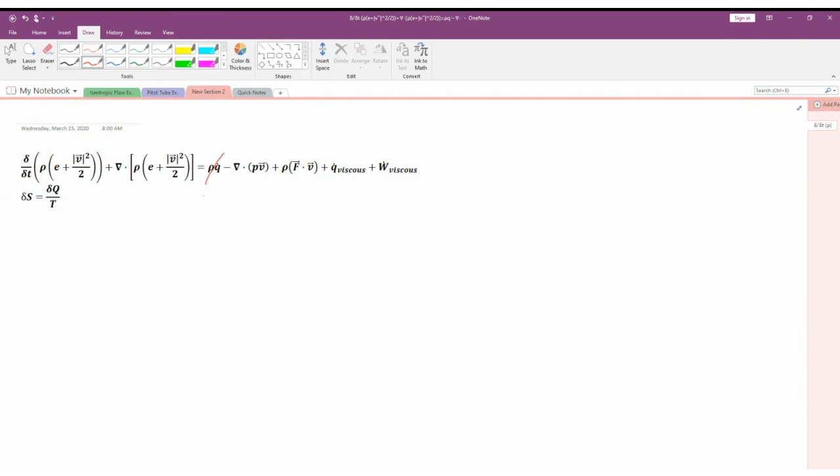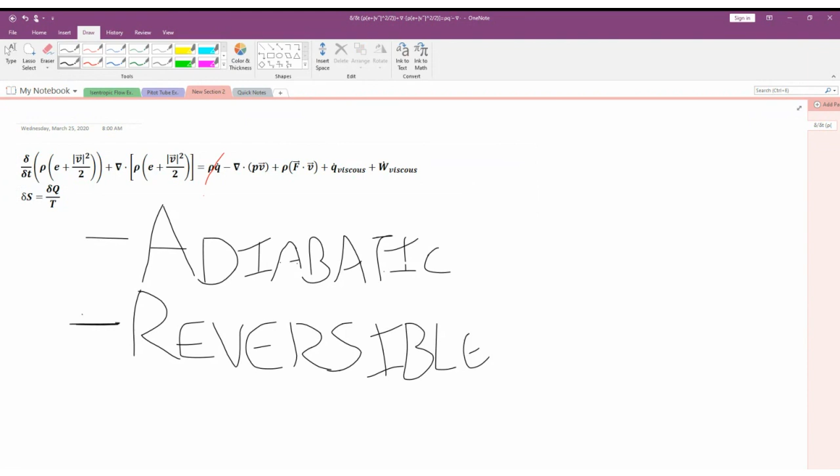But maybe the better way of thinking about it is that in order to be isentropic, the process has to be both adiabatic and reversible. Now, reversible, friction effects - no, so that gets rid of any viscous terms in here. We got rid of the last one not because of the isentropic assumption, but just because we assume that body forces, F, were equal to 0.

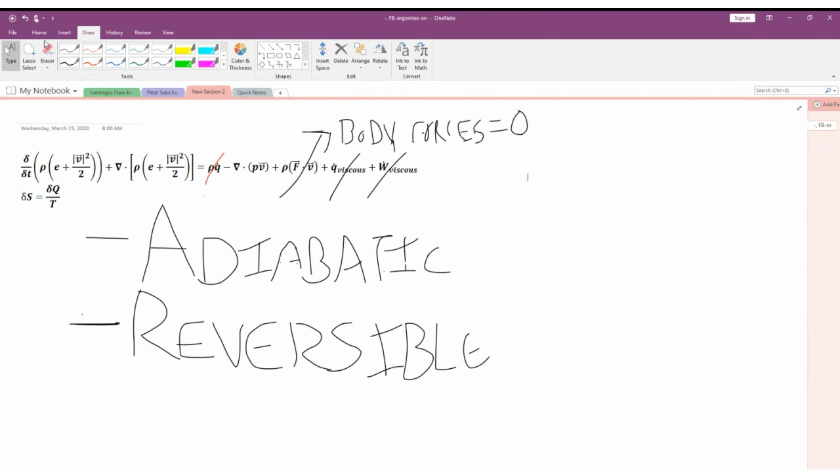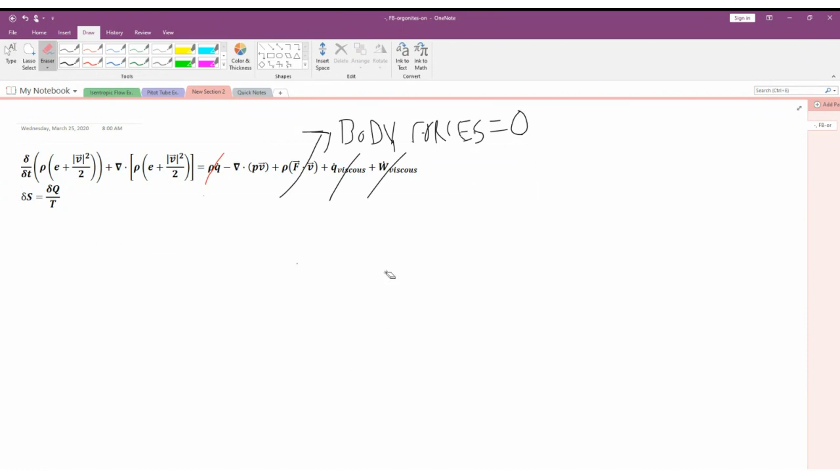Okay, we on board with that? Yeah. Sweet. All right, so isentropic processes are both adiabatic and reversible. It implies that it is an inviscid process, as well as one in which there is no heat transfer. We additionally assume there are no body forces, so it kind of simplifies the expression a little bit more, just ignoring EM fields, gravity, all that jazz.

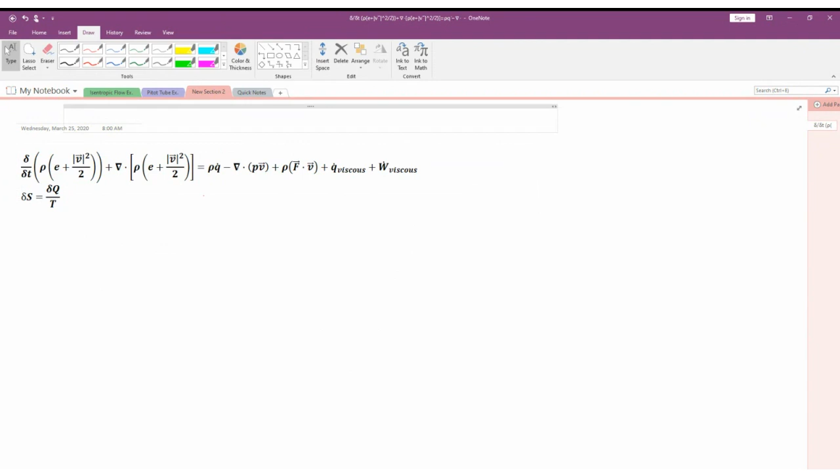Great. All right, so by using those and assuming steady flow, we got ourselves some isentropic relations as well as some stagnation relationships, or total condition relationships, where we related total pressure, total temperature, and total density to Mach number. So based on the incoming flow, if I isentropically slow that flow down to 0 speed, I can figure out

some relationships between pressure, temperature, density, etc., between the free stream and the stagnation point. That does, of course, assume a calorically perfect gas, which is - what is a calorically perfect gas? Calorically perfect glass - that'd be something interesting, gas is part of that. Absolutely perfect in every way. In some ways, in the adiabatic ways.

So it means that the CP/CV is that of an ideal gas, right? A perfect gas is one that you can treat as an ideal gas. A calorically perfect gas is one where the specific heats are constant. So your value of CP and CV you treat as a constant because their actual variations are relatively small over the range of expected temperature variations, which for us is pretty much anything under 1,000 Kelvin.

So, cool, all right, that's that. What I want to look at then, if we've talked about what some of the effects of going compressible are, maybe we can look at some of the more visible effects. So the 3 images we got here, these are either Schlieren, which is what we looked at first day of compressible flow, showing variations in color, black and white, with the exception of where a thing is, like right here or here.

Variations in color are variations in density. It's really variations in the first derivative of density, but we'll use it as a proxy for density here.

density here. Hello, Koi.

This one with the airplane in it is called a shadowgraph image. It's kind of like if you're looking down the road and you see a mirage, you're seeing density variations too. If you see shimmering bubbles of air, that's more or less what a shadowgraph image is. It's more like a background-oriented Schlieren image, usually called that, where you're looking at a background and seeing the density variations on it, instead of by the Schlieren method.

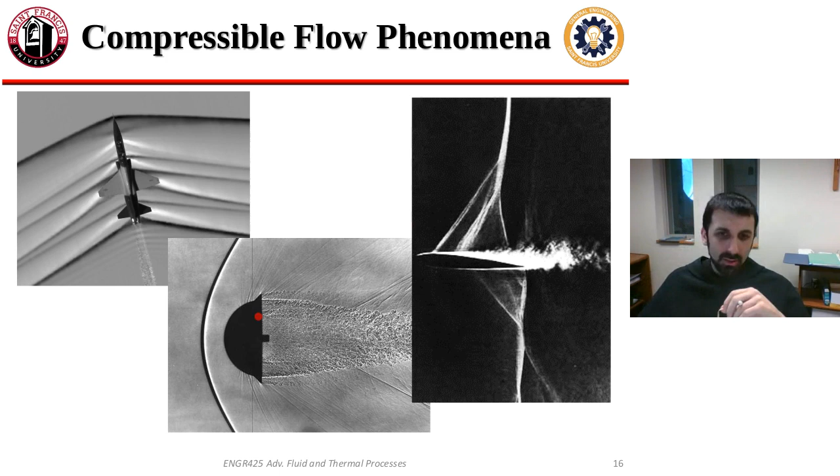So what did we say these dark lines are? Will that be a high density change? Yeah, so those are regions of obnoxiously high density change. There are some smaller lines like here, you can just barely see them, where you're getting some density change. Those are non-negligible, but the highest density change is where that darkest, most defined line is.

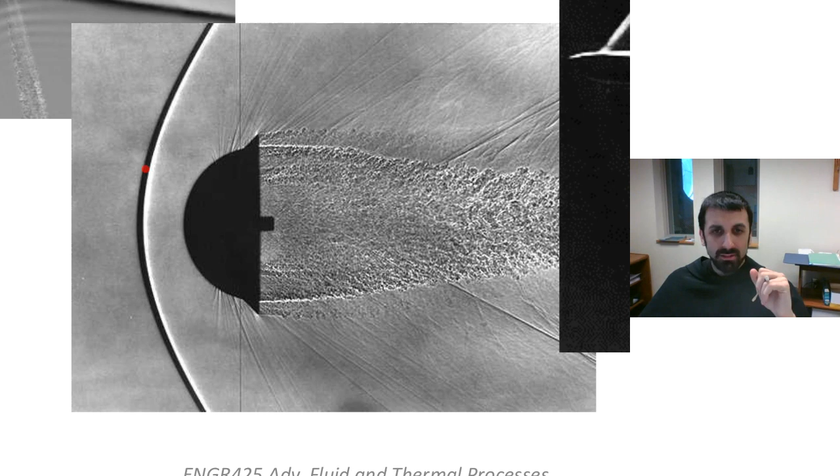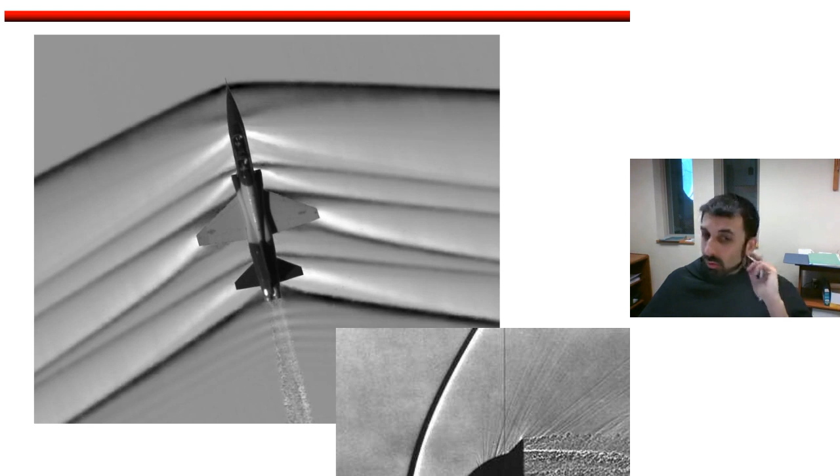You can see it on the T-38 as well, that's the kind of airplane this is. So that's where the greatest change occurs, and you see it has some thickness, not much, but some. This is what we're going to call a shock wave. It's a very thin region where you get intense variations in density. If you get intense variations in density, it means the pressure and temperature are also going to jump as well, because of ideal gas law relations.

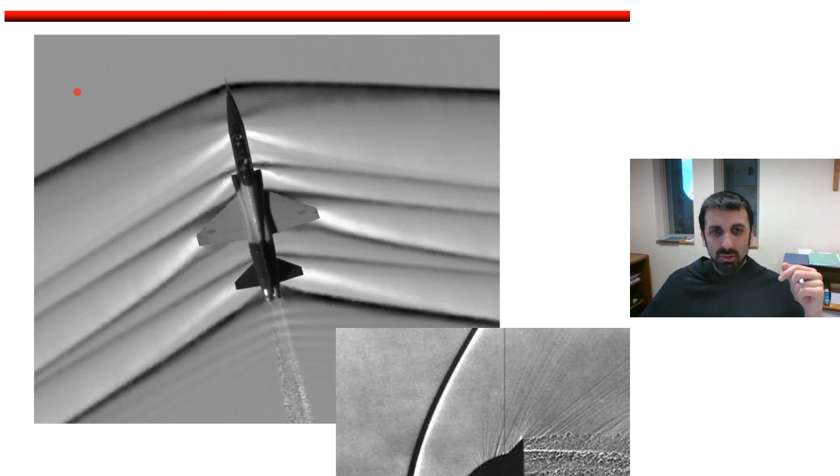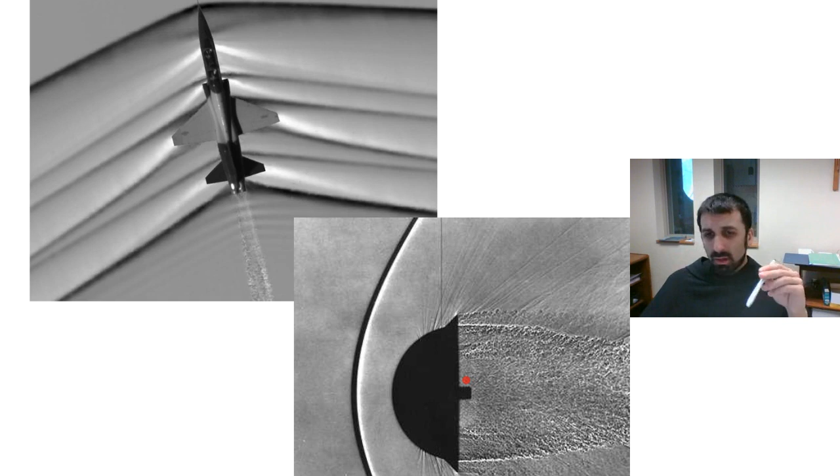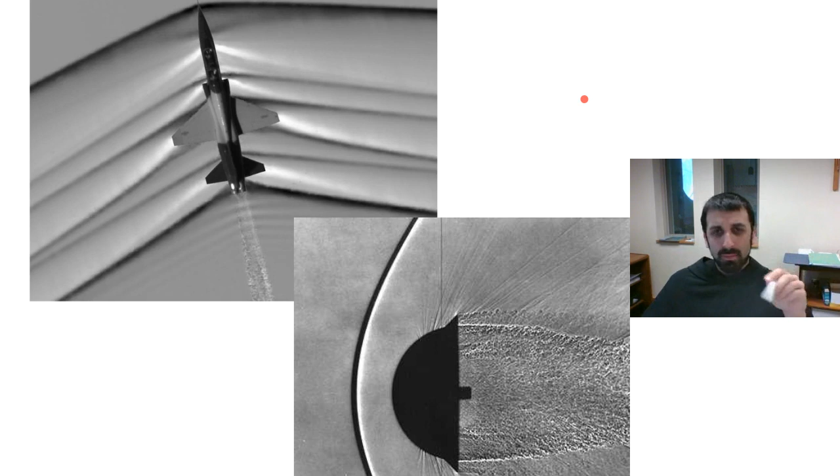So we can expect the flow on this side to be one thing, and the flow on this side to be something completely different. Let's keep focus on these two for right now. You can also see some pretty serious differences in how these shock waves form. What's the difference between this kind of blunt-nosed one here and the T-38? Is there any difference in the shock waves, how they form, and how that relates to the shape of the body causing them?

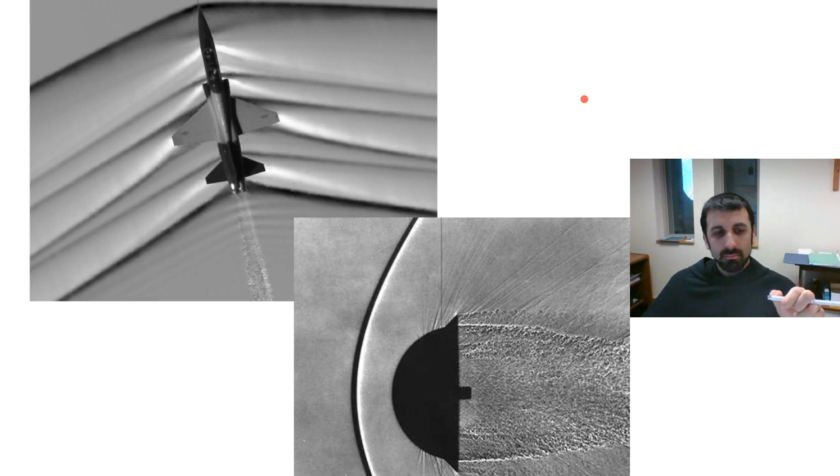Oh, with the jet, it's more pointed. Oh yeah, that's what Corey's saying - the rounder shockwave from the rounder point. Yeah, you got it.

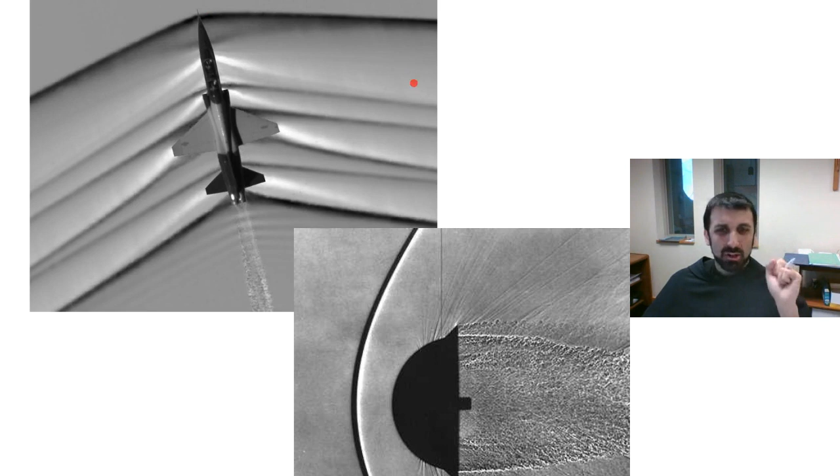There's a direct relationship between the shape of the body causing the shockwave and the geometry of the shockwave itself, which is kind of interesting. Like the T-38, as you say, has a very sharp nose here. You can see that, and as a result, the shockwave is very angular, almost a straight line, coming off of the nose of the vehicle.

However, if we go down to this kind of blunt-nosed object here, I want to say this was when they were testing out shapes for the Mercury capsule - Mercury or Gemini, I forget which. I think it was Mercury. This was one of the shapes. This end of the vehicle would be pointing down into the atmosphere as it made its reentry, and it's a much rounder shape. You see this very rounded shockwave coming off of it.

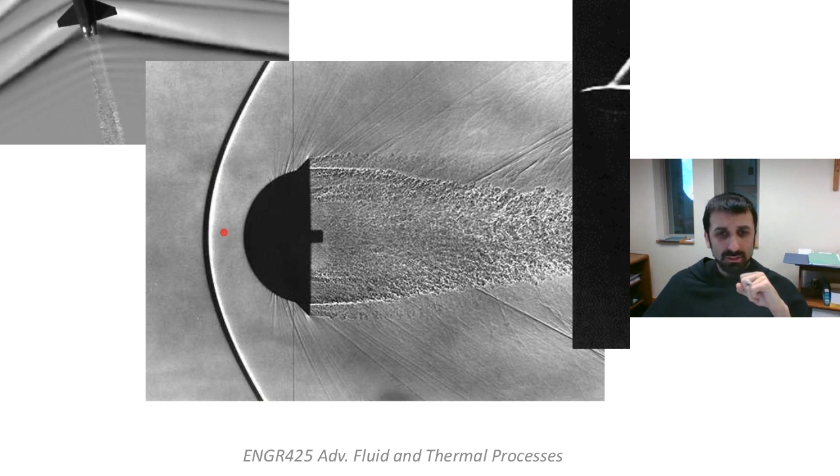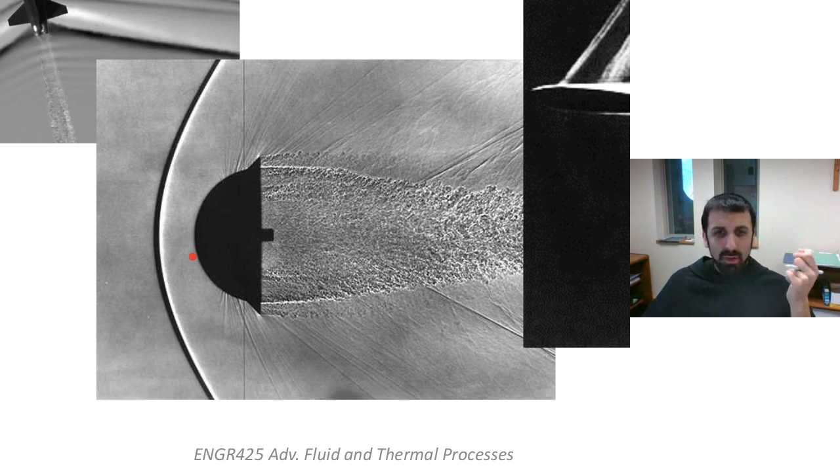It's also not touching the vehicle in this particular case. I can go up here to the T-38, and the shockwave is coming pretty much from the nose. Here we have what's called a detached shockwave, where the shockwave is happening some distance in front of the vehicle itself.

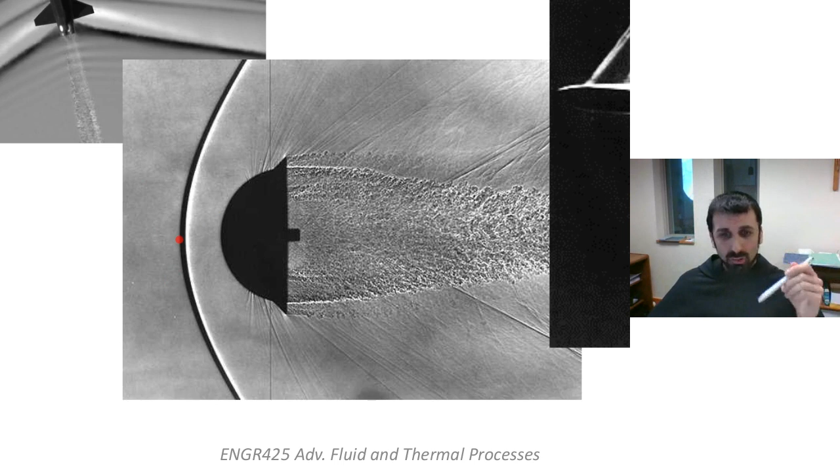Okay, so that's some kind of cool stuff. If we look a little bit closer, we might even be able to categorize these shocks a little bit.

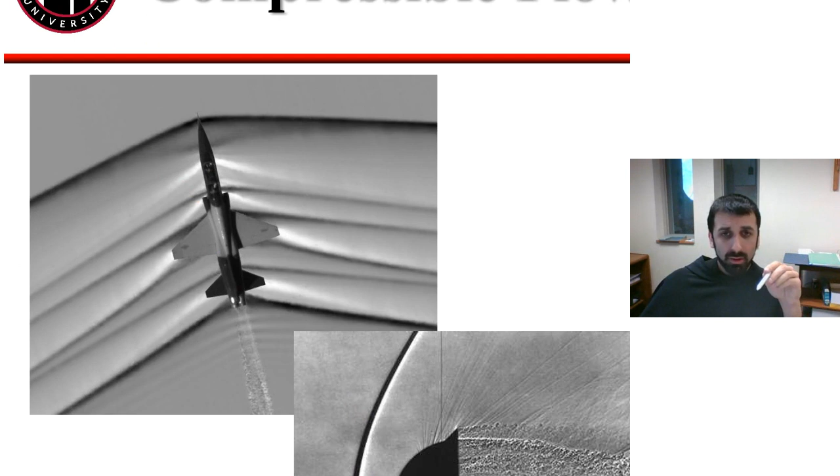Here on the T-38, the aircraft's moving straight through the air, right? It's just going forward. So the air by consequence, if we think of what the free stream might be doing, the free stream's coming straight in, right? So that means the free stream is approaching that shock wave at an angle. That's a characteristic we can think about. Because if we go down here to the blunt body, we have the free stream coming in straight again, right?

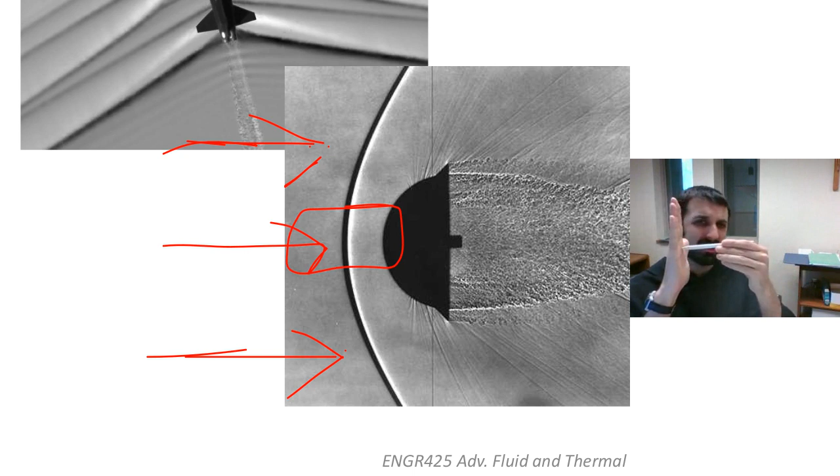Depending on where you are along the shock wave, the angle between the free stream and the shock wave is going to be different. In fact, when you're right in the middle here, it's almost 90 degrees. The shock wave and the free stream are almost perpendicular to one another, which is kind of interesting, as opposed to out here where it's much more akin to the shock wave and the free stream conditions in front of the T38, where they're meeting at some angle to one another. So we can kind of keep those two in the back of our heads as things we might want to look at later on, or ways we might want to look at shock wave flow interactions later on.

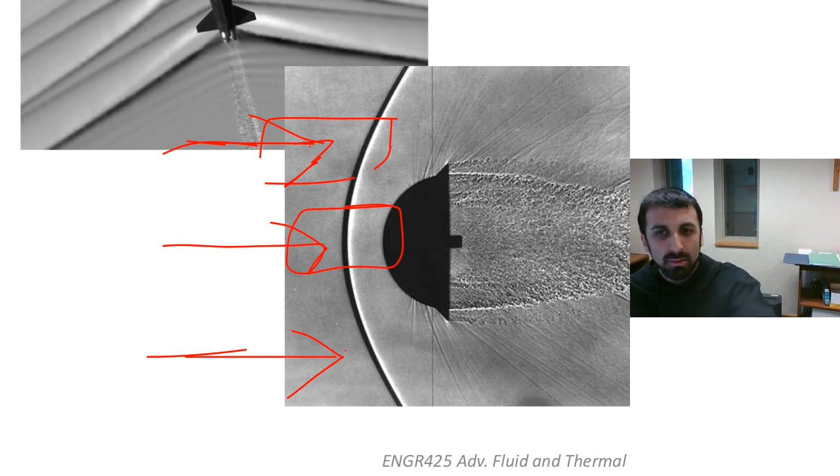Any other comments about those two guys, about the T38 or the blunt body there? Nah. All right, well let's go over to the really wonky one. This is...

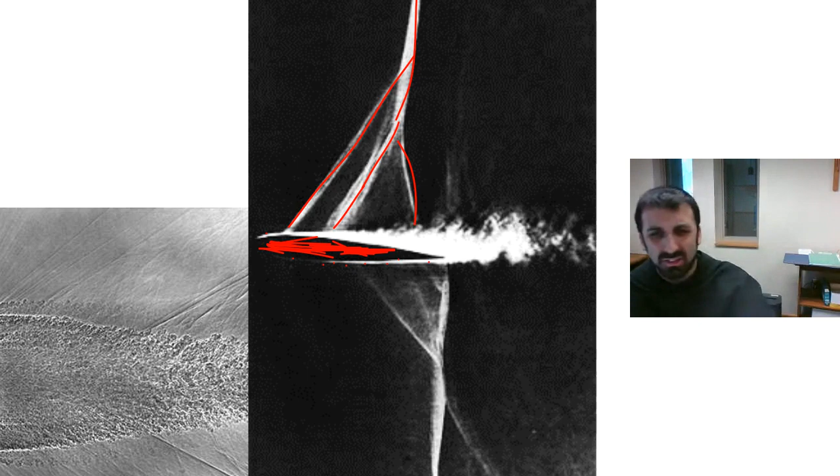An airfoil. You can just see the dark outline of the airfoil here. I'll try to color it in a little bit. This guy's a little bit different than the other two. There's no detached shock wave in front of it. There's no attached shock wave coming off of the nose. What's going on here instead? Like before, we have a shock wave. We have actually a kind of interesting shock wave structure, but it's coming off of the middle of the airfoil.

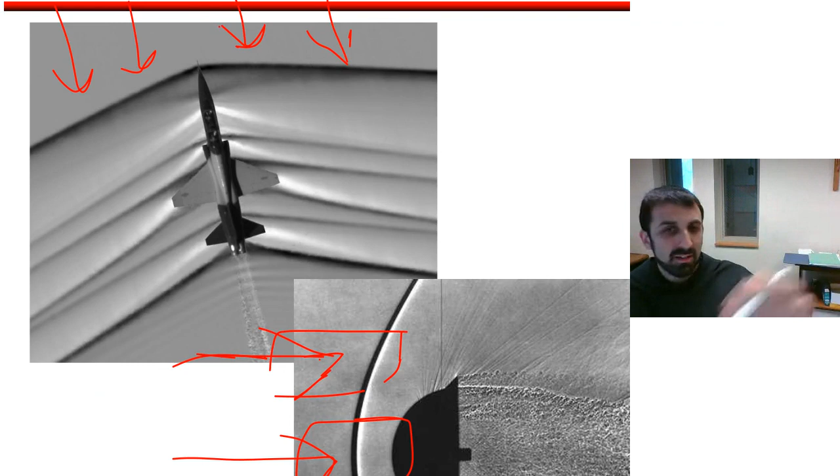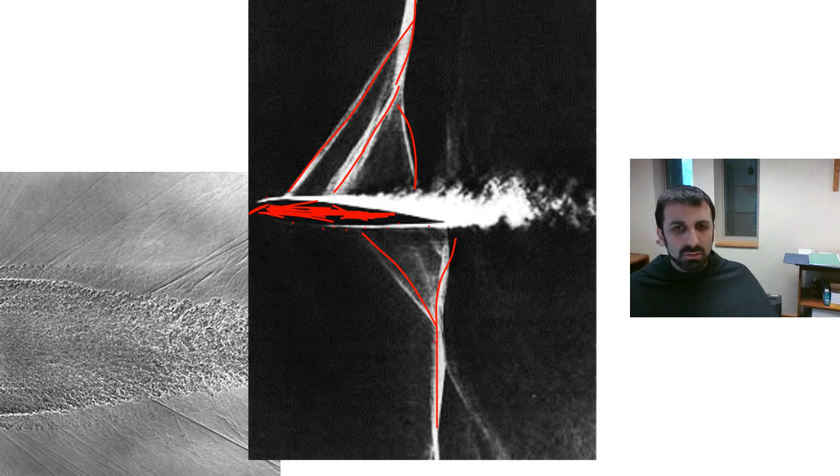So one thing that we could imply from up here is that shock waves are related to the fact that there's a thing in the way, and you have a supersonic flow. It hits it, comes into the thing and makes this shock wave. Here, there's a thing in the way, there's an airfoil, but there's not a shock wave occurring where we would expect it to be. Meaning, if this is the nose of the thing up in front here, we don't see a shock wave. So that means our flow is probably subsonic when it comes onto the airfoil. So why would we get a shock wave on top of this thing if the free stream is subsonic?

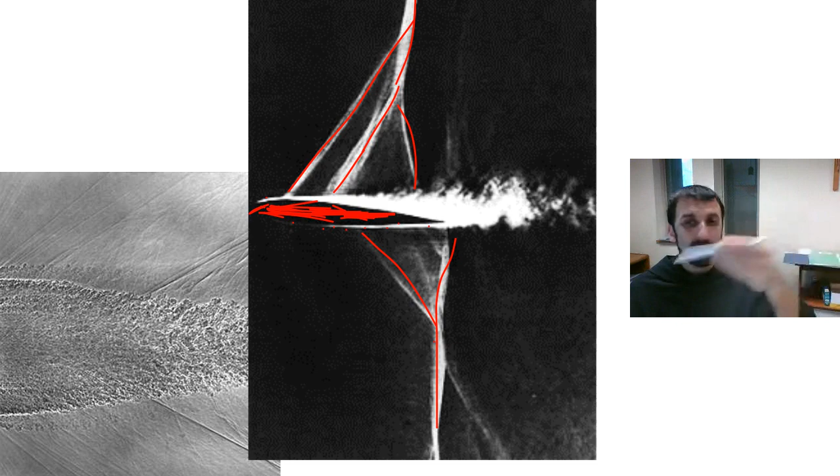Because it accelerates. Okay, cool. Right, we know from our incompressible flow analysis that flow should accelerate as it goes over an airfoil. Great. So if we're at a high enough subsonic speed, the flow might accelerate to become supersonic, and then maybe sometime after that, it generates these interesting shockwave structures.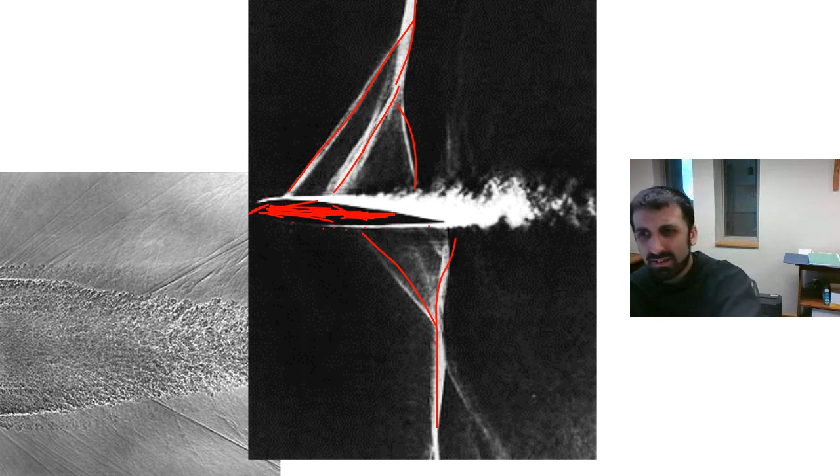But let's look at this a little bit more closely. So we're getting an idea that supersonic aerodynamics might be a little stranger, but if we look at it a little bit more, on the left here is subsonic. This is a subsonic airfoil, so free stream Mach number much less than 1. It's actually incompressible flow. This guy on the right here, the free stream Mach number looks like it's about 0.62 or so. So it's definitely not incompressible anymore, but it's definitely not supersonic.

So if I look at these guys, the maximum flow velocity in the subsonic case happens about there. In the incompressible case, it happens about there, a little bit before the quarter chord. What's different on the transonic airfoil? It happens more towards the back half.

Right, and does the flow actually slow down before the shock wave? Nope. It's really, really weird. Here, we see the flow slowing down pretty much as soon as you get past that hump, kind of the point of maximum thickness - the flow's all slowing down. Here, maximum thickness looks like it's about there, and the flow is still speeding up. So there's something weird going on.

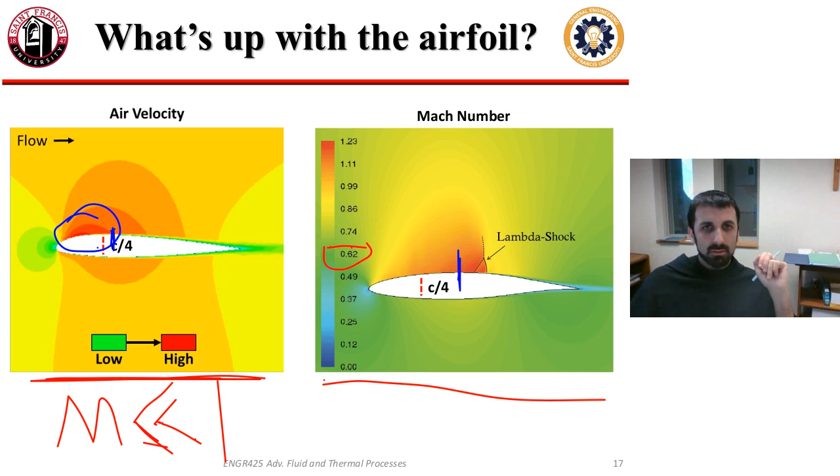In order to get an idea of what's going on, let's take a step back and look at something a little bit simpler. I'm going to pull up a Venturi here, because Venturis explain everything. Here we go. All right, can you guys also see the screen? Yeah, great. All right, just move this over here for a second.

All right, so what we got here is your usual incompressible Venturi, right? You guys all built these at some point in fluids. So in your usual incompressible flow Venturi, what happens to your pressure in the throat? Pressure decreases as velocity increases. Right, and that's a fairly straightforward relationship. We can plug and chug into the Bernoulli equation all day, get some pretty sweet relationships out of it. Life is good.

By the same token, if we looked at this in... actually, I think I have that. Sorry, I just remembered that I purposely made a slide for this. There we go, I knew I had it somewhere.

If you look at this in supersonic flow, it doesn't slow down again. As soon as flow exceeds Mach 1, as I open up my nozzle or open up my Venturi, my flow actually accelerates, which is weird, right? If we think of it from a continuity point of view, from incompressible flow, mass flow in is mass flow out. As area expanded, velocity had to decrease in order to maintain the same mass flow rate. Here, the velocity is increasing. What the heck? It's weird.

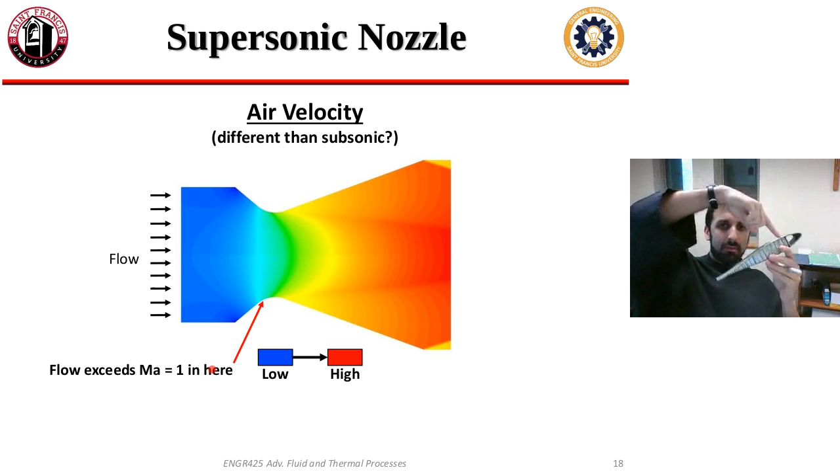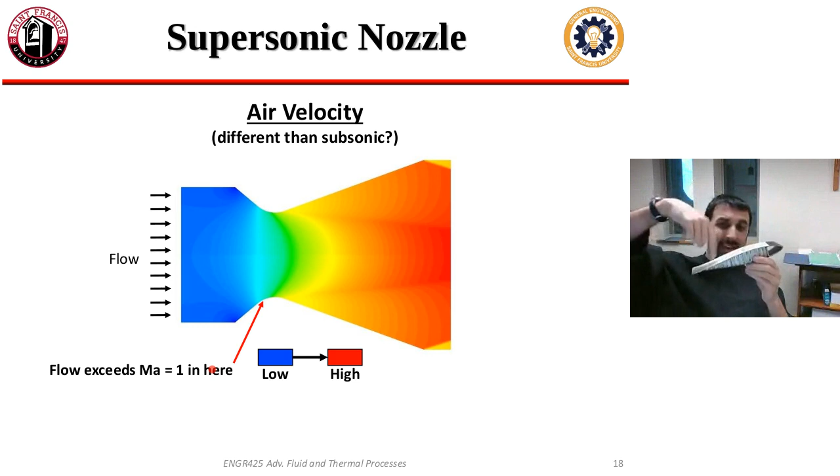Okay, we're getting there then, the best is yet to come. So going back to what we were saying, if I'm here, I can travel much further down the airfoil before the downstream conditions force me to slow down. Also, if I think of this kind of in reverse, if I'm traveling down the foil and there's lower pressure back here, I'm now traveling faster than conditions here are propagating upstream. So a downstream effect isn't going to even bother me because I will never know about it. That pressure gradient won't transmit itself to me because I'm moving faster than it.

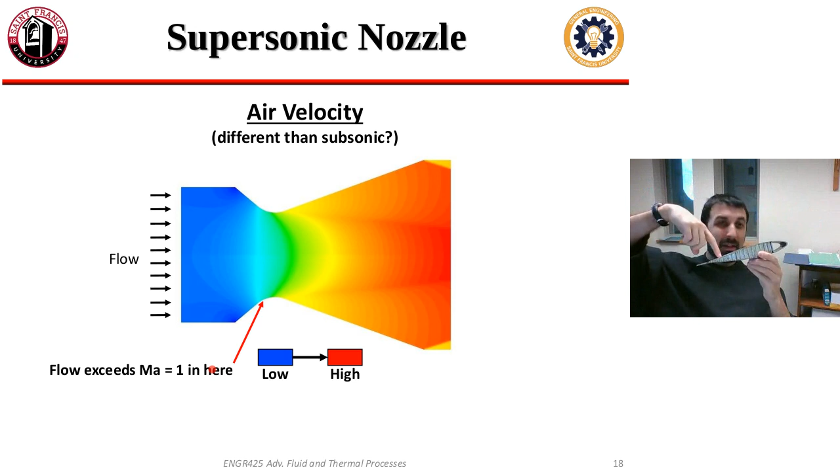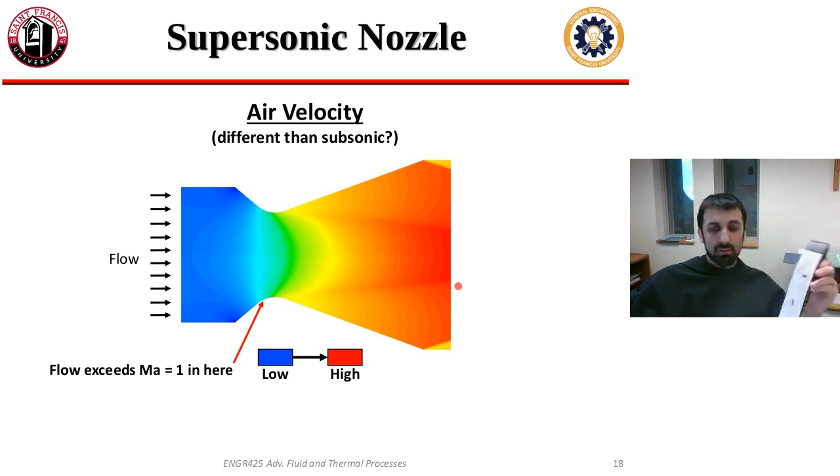So two things about supersonic flow. So if we look at our supersonic nozzle here, let's say that this is expanding into the atmosphere, same as our subsonic venturi. Let's see if I have this... there we go.

Because my flow is moving downstream so fast, when it starts to be expanded in the second half, the diverging part of this nozzle, where the nozzle is coming apart again, its only reason to slow down is because of a downstream pressure difference. Eventually it does, and we see what could be a shock wave here. But before that shock wave, there's nothing to drive it slower. There's no reason for the flow to slow down because there's no pressure gradient causing it to do so. As a result, if we think of this from continuity again, what mass...

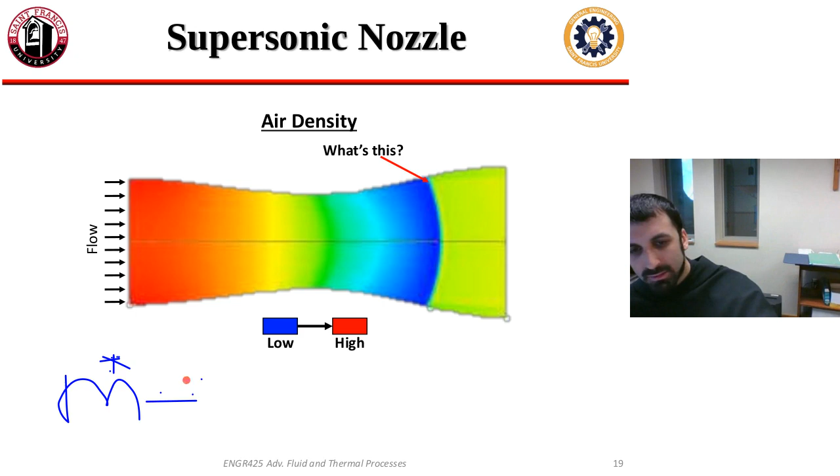Flow rate is constant. If mass flow rate is density times velocity times cross-sectional area, velocity is going up, area that the flow is going through is going up. What's actually going to change is density.

The density of the flow is going to go down in order to balance this whole mass flow rate thing, and it's going to decrease and decrease and decrease, and that's kind of what we see in this drawing here. We start from a relatively high density flow, say like 1.225 kilograms per meter cubed, sea level standard or something like that. As we accelerate, we expect from the isentropic flow relations for our density to go down, but as we expand, it goes down even more, because the flow doesn't know to slow down, it's not being driven to slow down until the shock wave. So the parameter that has to decrease in order to maintain a constant mass flow rate is density.

Does that make a little bit more sense, Ian? Yeah, it makes more sense now.

Cool. And then how nature kind of reconciles everything is that eventually the flow is going to have to slow down because that downstream pressure information is going to propagate upstream, and nature kind of makes it all work with a shock wave in order to correct the flow properties to what they need to be for downstream. It's one way of thinking about that.

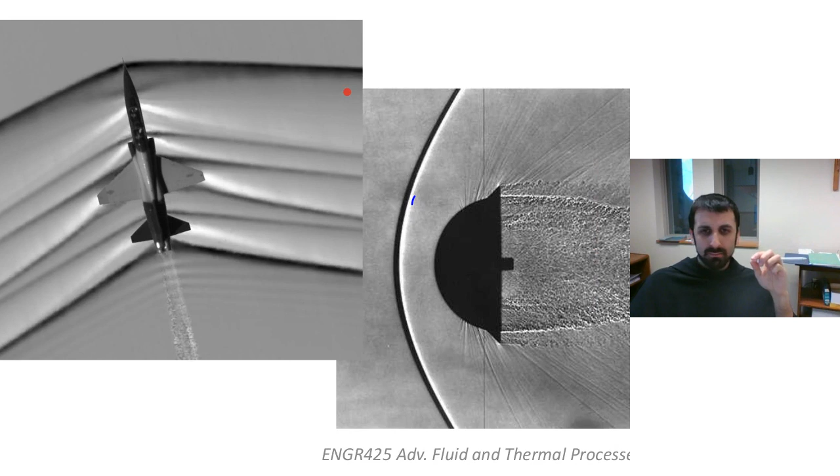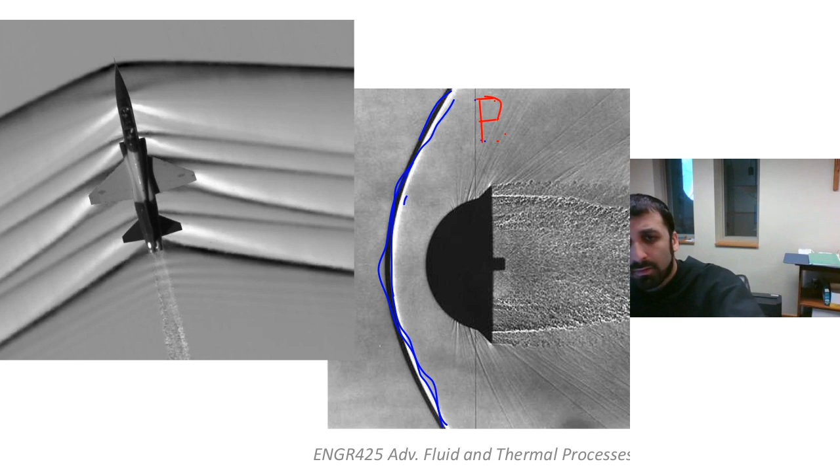We already talked a little bit about the fact that shock waves are entropic effects. So if we're looking at, say, this shock wave here, we can say that our flow on one side of the shock wave is going to be substantially different than the flow on the other side. One side will have a certain stagnation pressure, say if I could draw a P, that'd be even better. This side will have a different stagnation pressure. If I look at it from my entropy relations from a couple of classes ago, that's kind of where that pops out of, and it's called because those different stagnation conditions mandate a change in entropy.

So we know that we can't use our isentropic relations across the shock wave, but maybe we can figure out another way to work these relations, because we know what has to always be conserved. What in a flow is always conserved? What are kind of the three laws we've always fallen back on? The laws of thermodynamics.

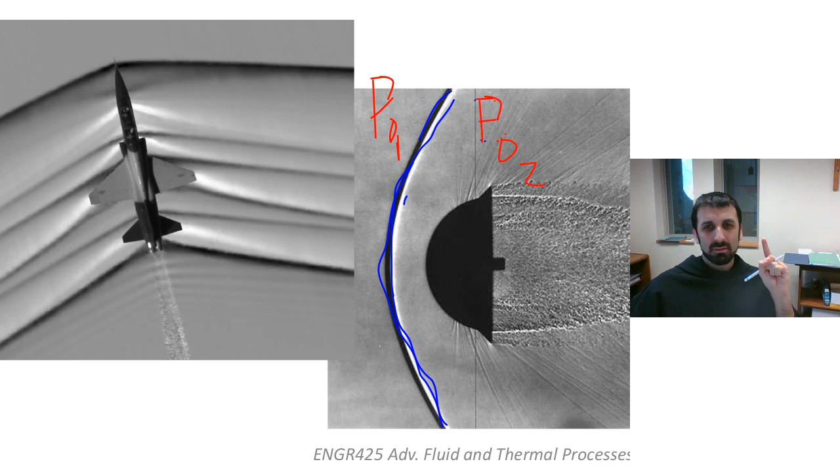Those are good, but what does the first law of thermodynamics say? That energy can't be lost or created. Right, so it's saying that energy is conserved. So that's like one conservation law. What other properties are conserved? What were we just talking about when we looked at the supersonic nozzle?

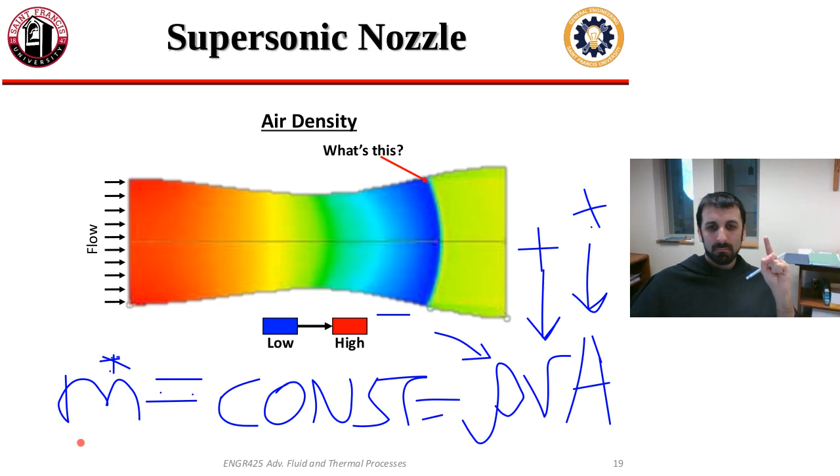Mass is conserved. What else is conserved? Momentum, yes—so mass, momentum, energy. Those are always conserved. If they're not conserved, we have problems—it means there's zero point energy coming in somewhere. So mass, momentum, energy: those things are conserved, and maybe we can build our shock wave relations off of that.

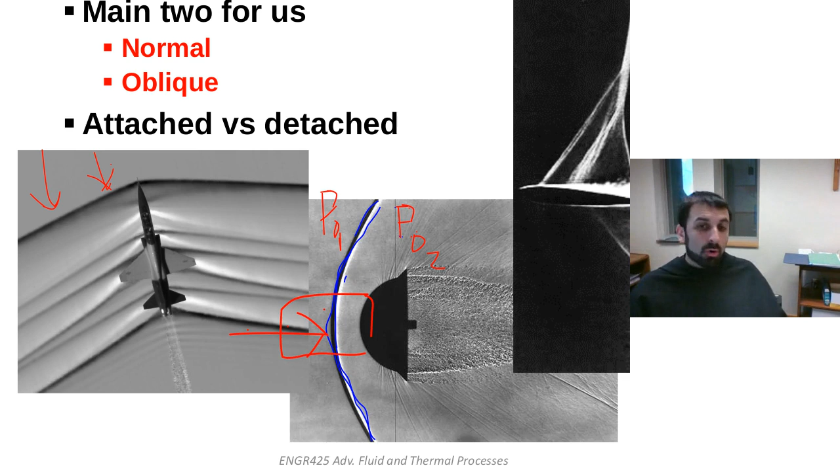But to be a little more specific about the kind of shock wave, like for the T38, we have flow coming into the shock wave that's not normal to the shock—it's on some oblique angle. We call that kind of shock wave an oblique shock. Very inventive, right? As opposed to right here in the middle of this shock wave, where the flow is coming in normal to the shock—at a right angle. We call that a normal shock. As you might imagine, it's a little more straightforward to look at because there's just less involved.

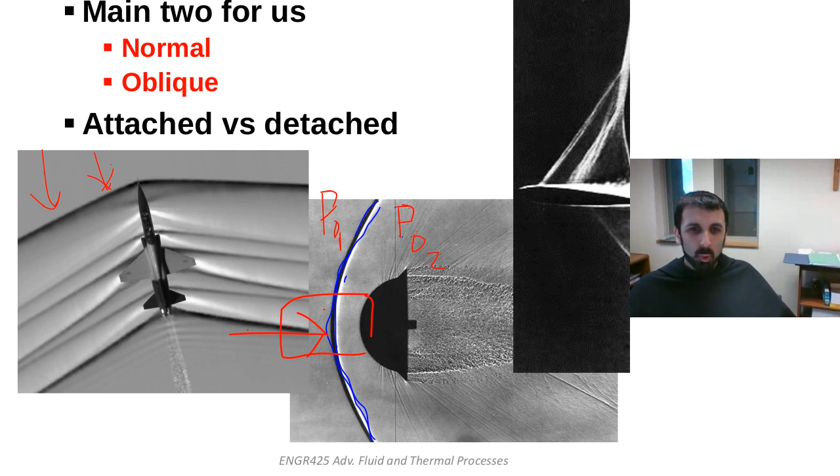So we're going to look at a normal shock first. Game on. All right, here are your two models for it. We're kind of focusing on this former guy here—we're going to focus on this guy first.

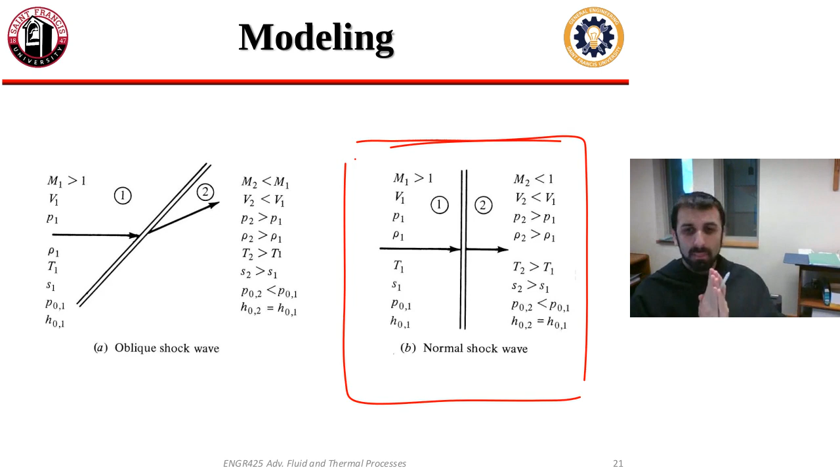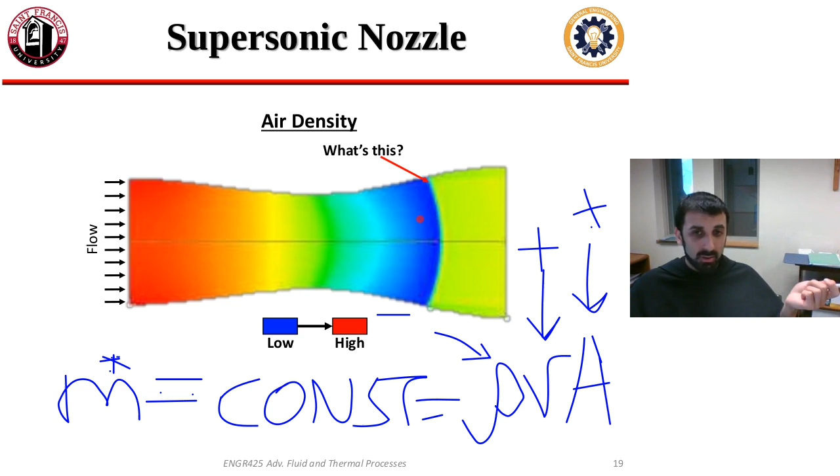So when we looked at variations in flow properties before for incompressible fluids, we said there was some differential variation in flow properties—like this flat plate in flow, there's some small difference in velocity on top, some small difference in pressure on the bottom. Is this ringing any bells? Okay, cool. But for a shock wave, the differences aren't small anymore. That much we can see just by looking at this nozzle. This thin area is a shock wave, and look at the jump in density across that shock—it's humongous, relative to all the property variations going on throughout the rest of the nozzle.

So instead of some differential amount, we're just going to have state 1 and state 2, and we'll try to find some relation between those two. We're assuming different everything: pressure, density, temperature, Mach number, flow velocity, stagnation pressure, stagnation enthalpy, stagnation temperature, entropy. We're assuming everything's going to change in some way. So let's see how things go.

Before we get into this too far, out of the assumptions we've talked about so far, we've said we can't apply isentropic relations across the shock wave. You can apply it on either side of a shock wave, because there's not a shock wave anywhere else, but we can't apply them across the shock wave. You might think of the shock as an irreversible process—that thin region that is the shock. This thing here is like a highly viscous film, if you will.

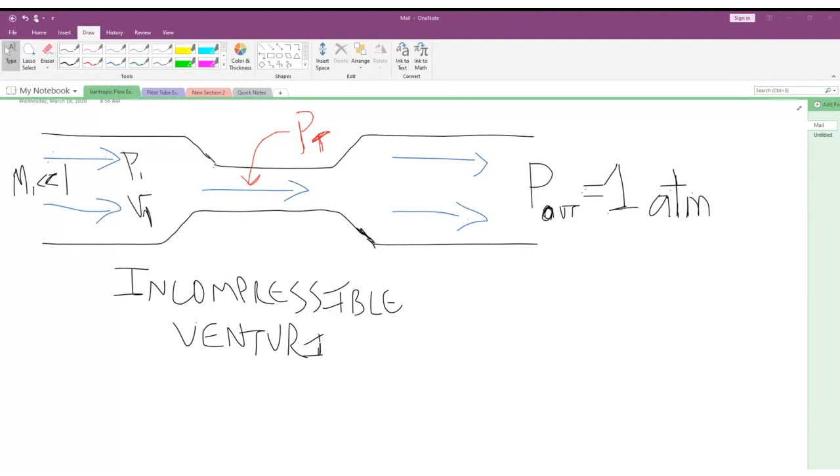Alright, so let's start throwing some math down and see where we can get. All right, so we have our model here. Okay, so if I want to start throwing some math at this...

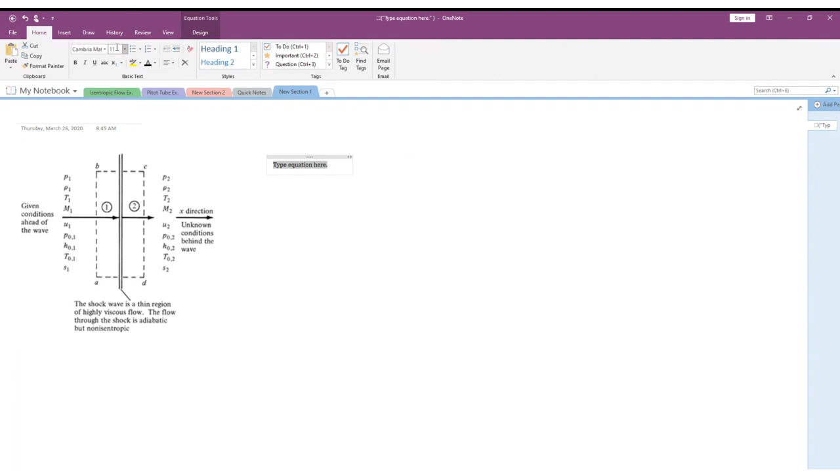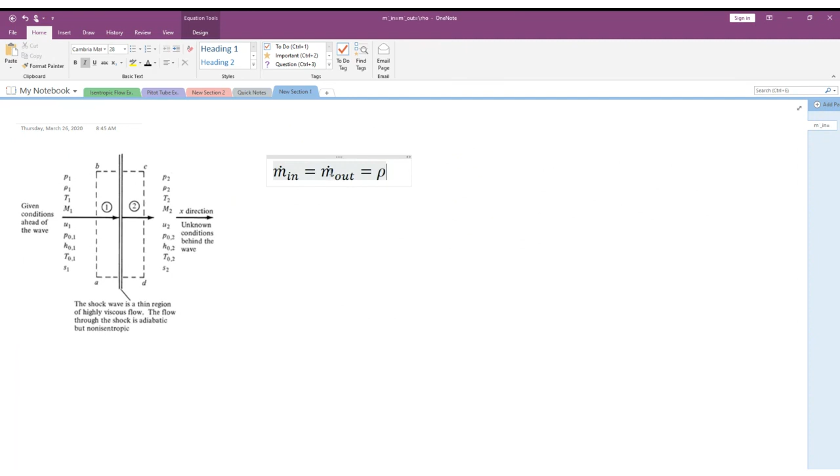My first stop is usually like a conservation of mass thing, right? So it's like m dot in equals m dot out. That's density in times velocity in times area, and equals density, velocity, area on the other side.

Anything here that I can relate to each other? Like, is density the same, or velocity the same, or area the same? The density isn't the same between either side. But the area is the same, right? It's the only thing that is the same based on our normal shock model. We know the density is going to change. We know the velocity is going to change because it's a normal shock.

We've drawn our control volume as a rectangle, so we know the area taken up by the flow going through the shock wave is going to be the same. So from continuity, from conservation of mass, we can get to this relation that says rho 1 v1 equals rho 2 v2. Great, all right.

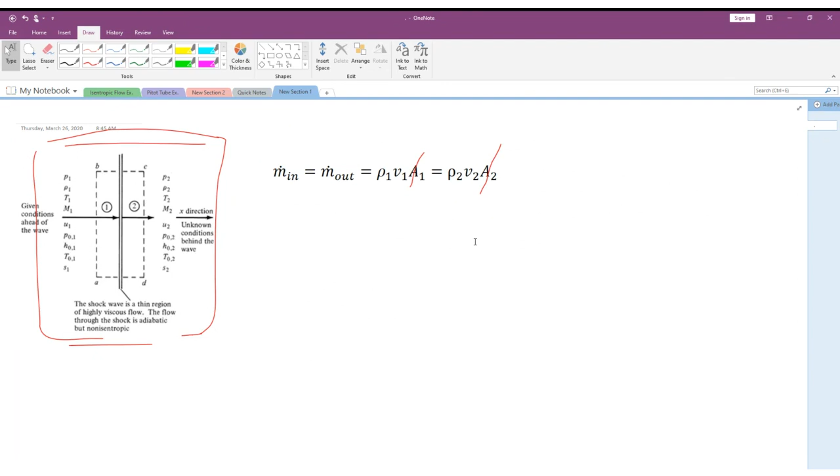So next up, conservation of momentum. This equation is a little bit more complex, and I don't know all the shortcuts yet, so if we do that, we get an equation like this. So this would be conservation of momentum, versus conservation of mass. So conservation of momentum, we get this guy here.

Great, what the crap does this mean? So let's go through term by term again in here. Let's start with this guy here. We got a rho v in here. What's that kind of like? What property is that analogous to? Density times velocity. Mass.

That's called velocity, not volume. Yeah, there. So density times velocity. Momentum, right? Yeah, it's really like momentum per unit volume, right? Because it's the density, so that's like momentum per unit volume. I'm multiplying by dv. dv in this case is what's called, you're integrating across the volume. This v is volume. So I'm multiplying a momentum per unit volume times the volume. I get just momentum out, right?

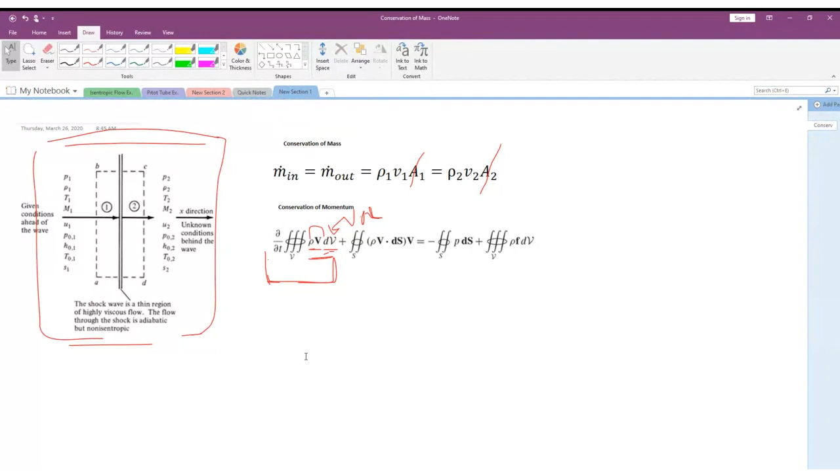We know that inside of the integral, we have momentum. So you can kind of think of the integral as being all the momentum in the control volume. But what's this d/dt thing?

That's if it's steady or unsteady flow. Okay, so it's kind of like the time rate of change of momentum. If it's unsteady flow, that could change. If it's steady flow, what's it going to be? That's going to be zero. And as said, we are looking at steady flow, so this whole term goes to zero. Great, that's easy.

This guy here, what's familiar out of that term? Do you see any familiar things inside of it? We got rho v. Okay, so we know that there's a density, so we know there's a momentum in there somewhere.

And then this ds guy, when we last saw that it was like an area term. It was usually like one side of a control volume, and we had flow going through that. So this is like momentum going through a side of our control volume. If you're familiar with electric flux or magnetic flux, this is momentum flux. You have some fluid going through a side of our control volume at some rate. And that's not something that any of our assumptions really prohibit, which is good because it means flow is moving through our control volume. So we're going to leave that guy alone.

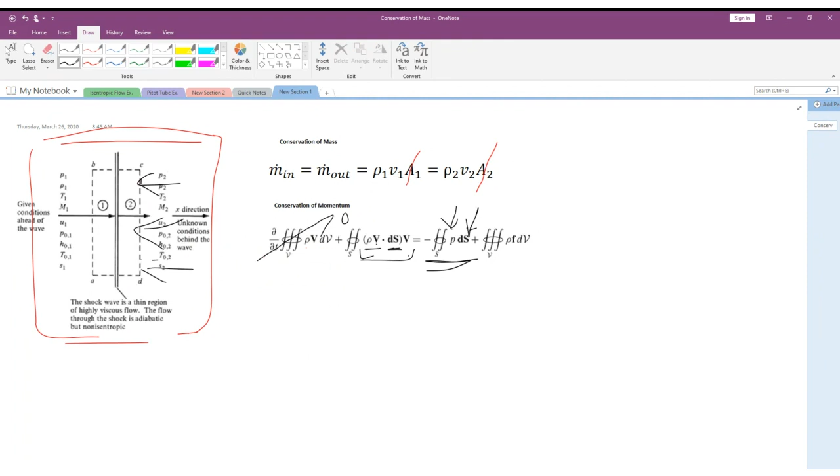Determine the gradient, I guess. Yeah, so we have pressure acting on our flow at the edges of the control volume. From a conservation of momentum standpoint, this is kind of like the pressure gradient that I'm moving through. Or in supersonic flow, maybe it's the pressure I need to meet at the back end. Or in our case, it's the pressure after the shock wave that's pressing back on my flow.

So this term, this P dS term, is called my summation of forces acting on my control volume, or acting on my flow. So that's a good thing to have. It's not something I don't want, it's not something more complicating. It's something that is natural to the flow, and I should expect to have.

This last guy, we said that F is our body force term. So things that act on the entire fluid in some uniform fashion or almost uniform fashion, like electromagnetic fields, gravity fields, all that sort of stuff.

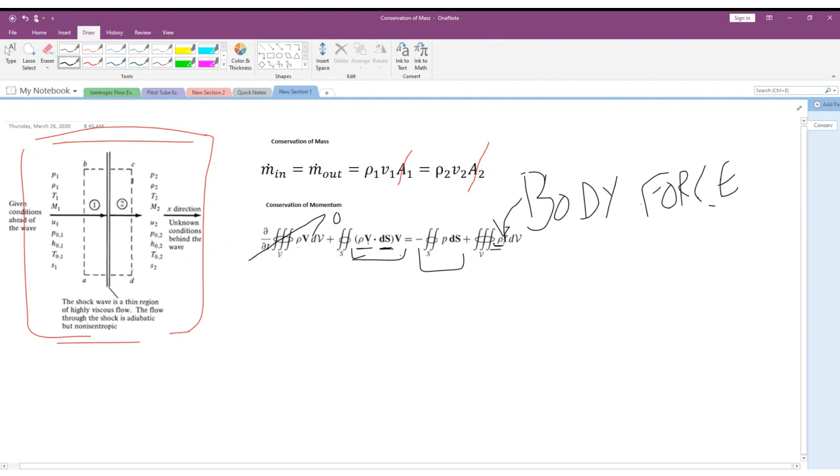So we have some force per unit volume, force per unit mass. Think of this in terms of gravity, say. We have some density, right? So that makes it like when I multiply density and a force per unit mass, it makes it a force per unit volume, right? Then if I multiply by a volume, that makes it a total force.

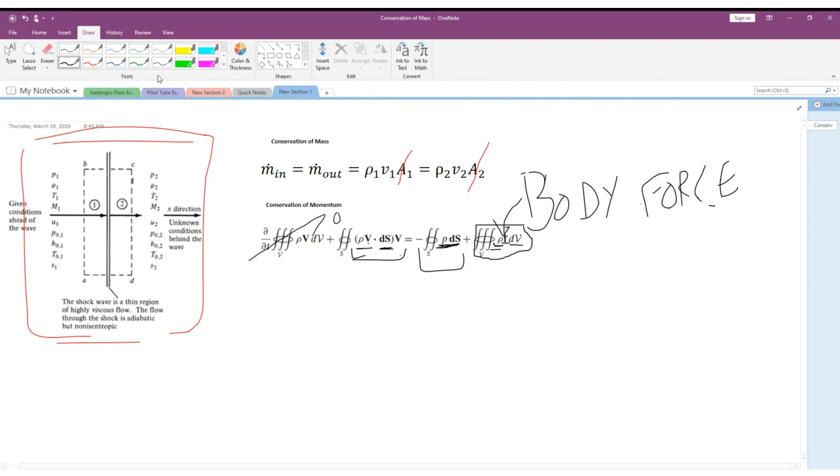Then I add all those up in my integral. So the same way that pressure times an area is like a force, this is also a force. But what have we been saying about body forces? Are we caring about them? Throw them out the window and let gravity take care of them.

Yes. So for now, we're just looking at flow effects. We're not caring about gravitational effects on the flow. We're just looking at the flow itself. So all we got left are these guys here.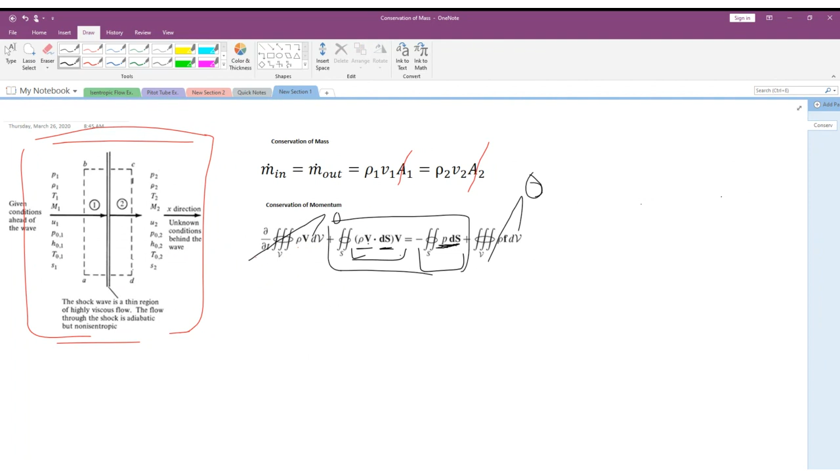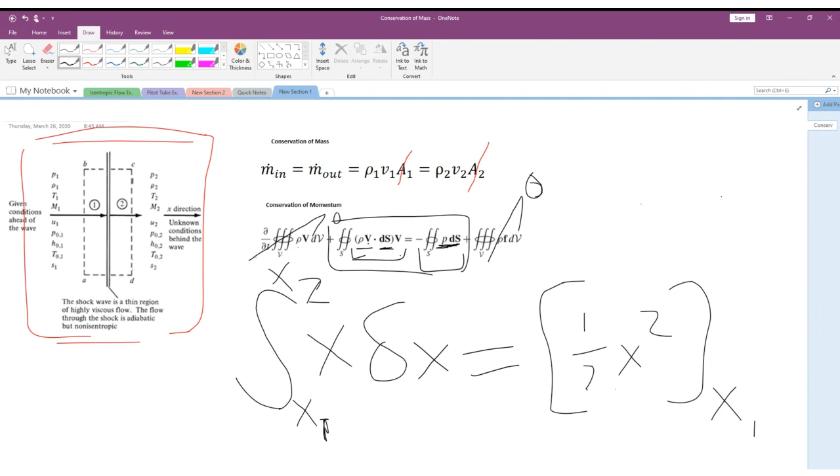So if I consider my integral, when I integrate like say from x1 to x2, what I get out is 1/2 x squared from x1 to x2, right? Something like that. This might seem dumb, I promise I have a point.

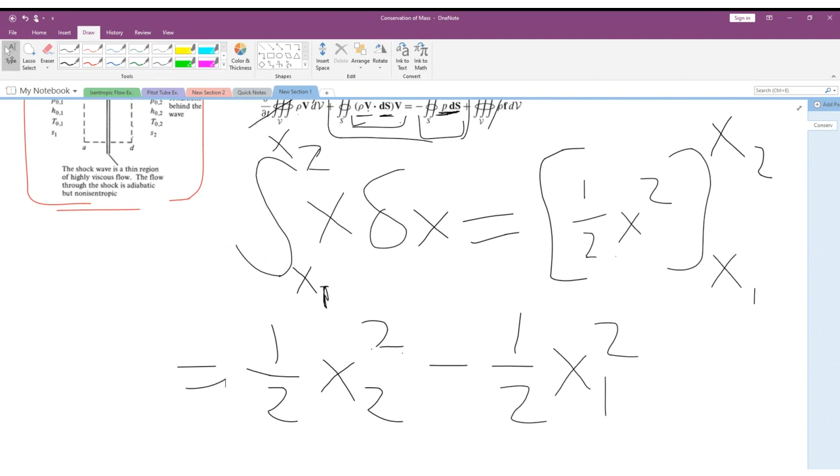So when I substitute those in, I get something like this. So really, an integral is just moving between two states. In this case, my states are x1 and x2. Up here, I have integrals here. Well, I'm moving between state 1 and state 2. So I'm just moving between those two states, those two sets of properties.

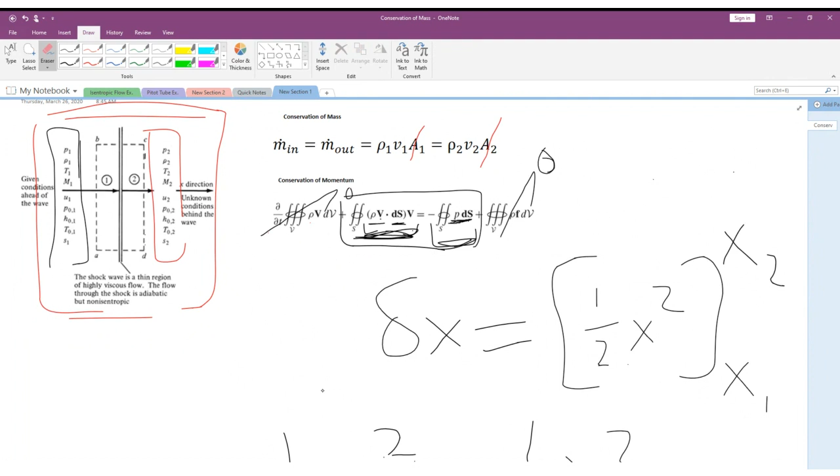So when I write this puppy out, I'm going to get something that looks a bit more like this. Let me just try to do this in a little bit more legible way.

So that first term there is what? Density times velocity times an area, dS. So it's like moving from state 1. If I say that entering my control volume is negative, leaving it is positive, then I have a negative velocity coming in, multiplied by my area, and that's times u1.

So this is exactly what's in this left-hand integral, right? So it's like a rho, a velocity, times a perpendicular area times a velocity again. That's literally just whatever's in my integral there. Except I've integrated my dS because it's now not a differential area, it's an area. It's a complete side of my control volume.

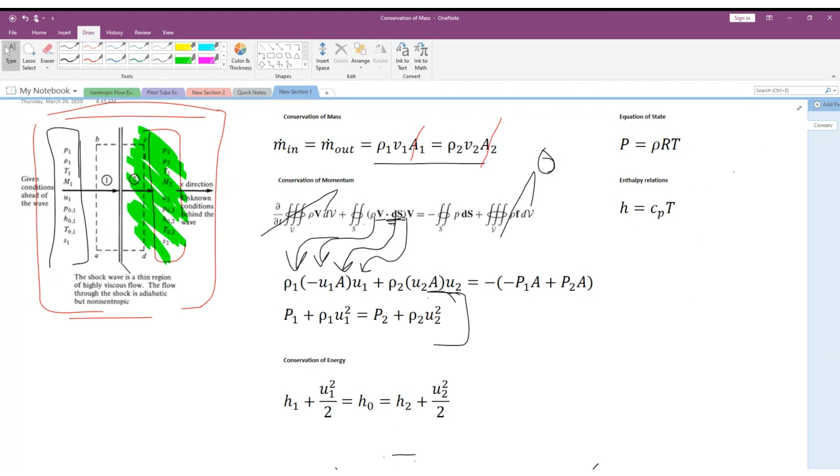So before we get too far into this, let's see if we can get a relationship between Mach number and some of our conservation equations, because right now they're all in terms of flow speed, which is nice, but again, the important term is going to be Mach number. So let's get on it. Let's erase the rest of these. Cool, all right.

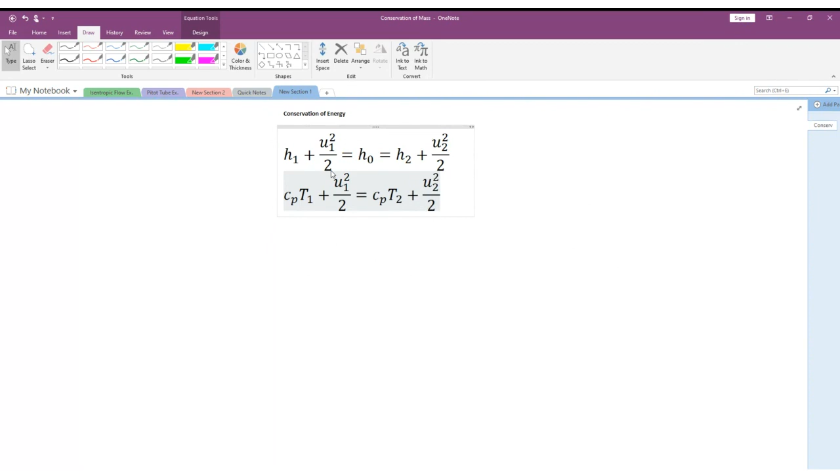Starting from our equation for the conservation of energy, we know that enthalpy is the same thing as specific heat times temperature. So I can throw that around. Maybe let's see if we can simplify this equation a little bit, to get more things that are the same, especially because I know that Mach number is related to speed of sound, right?

And speed of sound is defined as what? What was our expression for that? The square root of... Yep, that's all I got. I got square root, okay. Is there temperature in there?

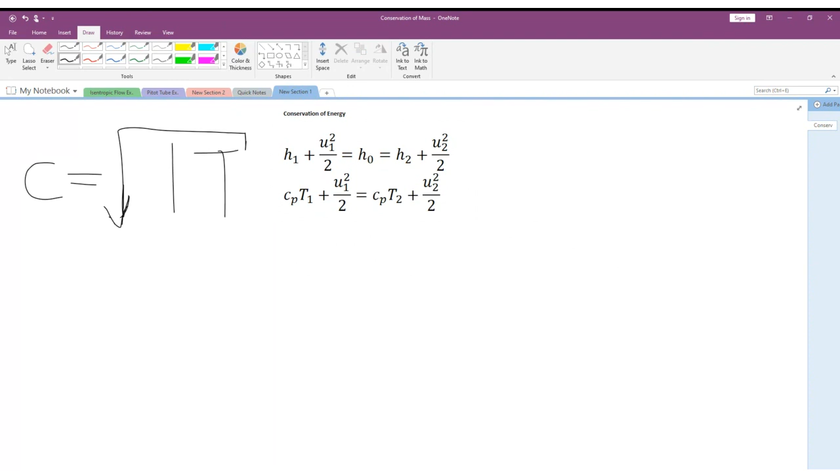Is the temperature in there? It is. Flow? Yep. As well as the gas law, as well as the gas constant for the fluid, and gamma, the specific heat ratio. So that's our speed of sound.

So if we can get this to pop up in here, we can get Mach number, right? Because Mach number is just flow speed over the speed of sound. So if we can get speed of sound to pop up, maybe we can make this work.

By making this substitution, that gets us the temperature. And when we were deriving our isentropic relations, we said we can define our specific heat in terms of a specific heat ratio and our gas law and our gas constant. So we can get some gammas out of this, we can get temperatures out of this. It seems like we should have all the building blocks for getting speed of sound and thus Mach number out of this.

So let's keep this rolling and see where we get. Let's make that substitution in here: gamma R over gamma minus 1. Oops, if I put that in the right way, it would help. Okay, that's there.

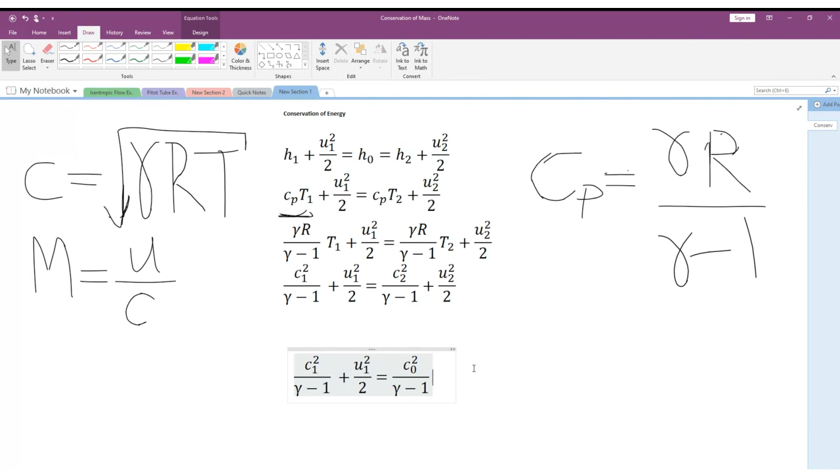So, how do I want to say this? I can play that game, but that doesn't get me all too much. What if I go the other way? What if instead of slowing the flow down, I speed it up instead?

What if I isentropically speed the flow up to Mach 1? So that's now the speed of sound. We're going to call this my star condition. And since these two are the same, there we go. So the flow's traveling at this starred condition. It's been isentropically accelerated to the speed of sound.

This might actually be able to work out for us a little bit easier, because we know that we can get a Mach number out of this on both sides of the equation, instead of still having a speed of sound in here somewhere that's kind of loose. So let's see what we can do.

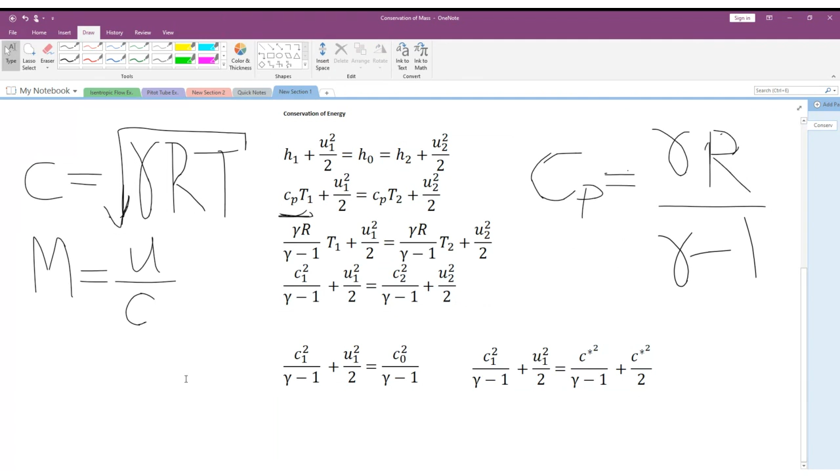I'm going to... how do I want to do this? I'm going to divide through by... sorry, I lost my notes here. Oh, that's what I need to do. If I divide through here, do a little bit of...

Rearranging. So I'm going to compress because we're almost out of time. I can cudgel this equation into something that looks like this.

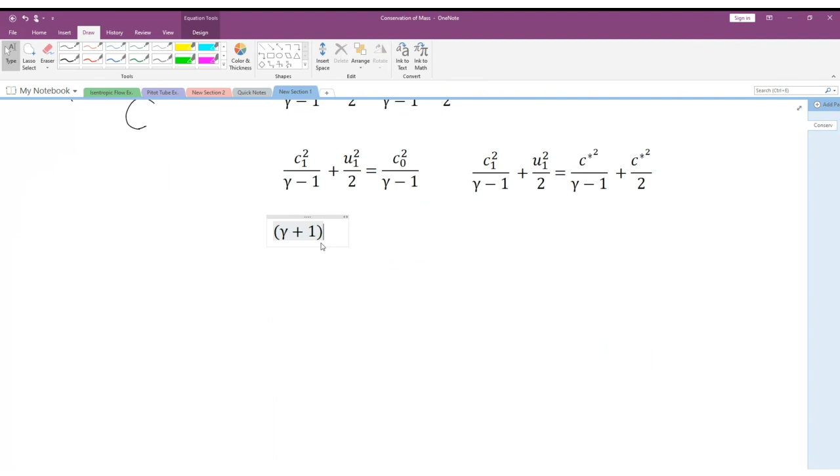Where I have my speed, where I can kind of simplify things into this expression for that adiabatic condition—the condition where I've adiabatically and isentropically increased my flow speed to the speed of sound. I can get that expression as a constant.

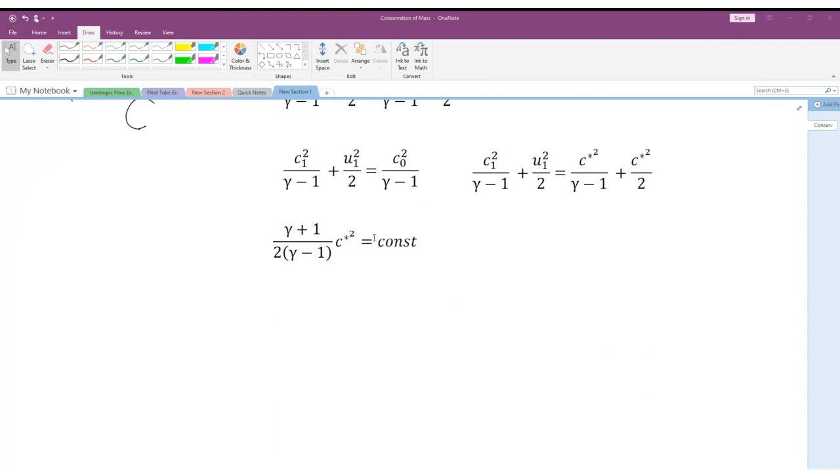And next time we'll talk about that a little bit more and what it does for us, because we're presently out of time. But are there any questions how we got to here?